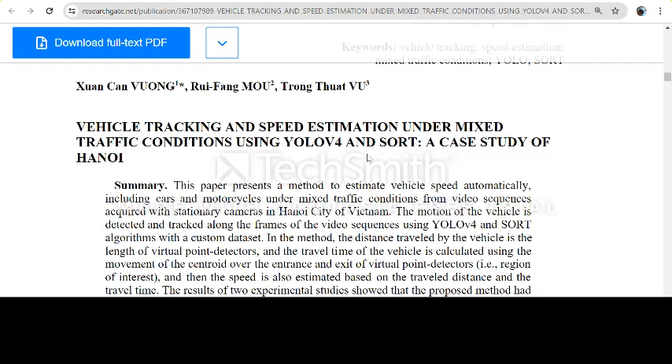This paper presents a method to estimate vehicle speed automatically, including cars and motorcycles, under mixed traffic conditions from video sequences acquired with stationary cameras in Hanoi City, Vietnam.

The motion of vehicles is detected and tracked along the frames of the video sequences using YOLOv4 and SORT algorithms with custom datasets.

In the method, the distance traveled by the vehicle is the length of virtual point detectors, and the travel time of the vehicles is calculated using the movement of the centroid over the entrance and exit of virtual point detectors, for example, region of interest. Then the speed is also estimated based on the travel distance and the travel time.

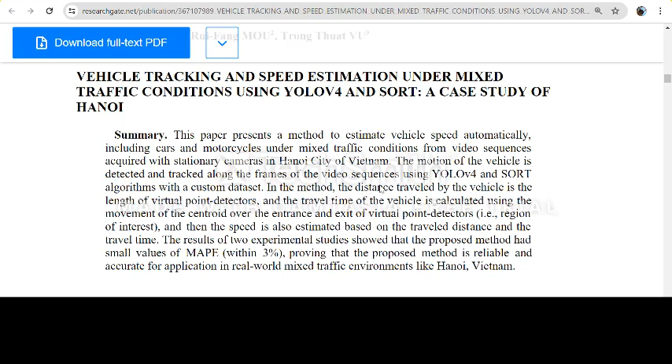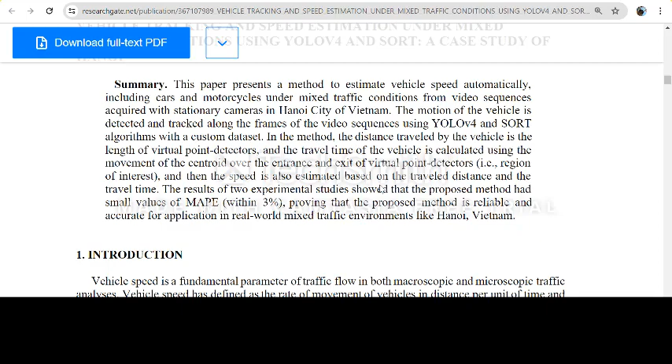The results of two experimental studies show that the proposed method has small values of error within 3%, proving that the proposed method is reliable and accurate for application in real-world mixed traffic environments like Hanoi, Vietnam.

Vehicle speed is a fundamental parameter for traffic flow in macroscopic and microscopic traffic analysis. Vehicle speed is defined as the rate of movement of vehicles in distance per unit of time, and it is indirectly or directly related to the traffic state and road conditions.

Speed measurement will help policymakers estimate and assess the traffic state and other anomalous events, as well as implement solutions to deal with the overspeeding behaviors of drivers.

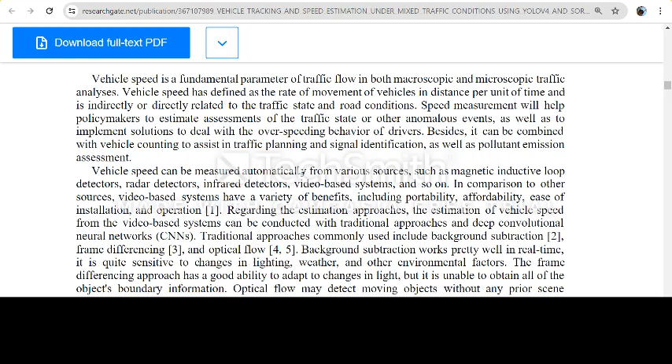Besides, it can be combined with vehicle counting to assist in traffic planning and signal identification, as well as pollutant emission assessment. Vehicle speed can be measured automatically from various sources such as magnetic inductive loop detectors, radar detectors, infrared detectors, video-based systems, and so on.

In comparison to other sources, video-based systems have a variety of benefits, including portability, affordability, easy installation, and operation.

Regarding the estimation approaches, the estimation of vehicle speeds from the video-based system can be conducted with traditional approaches and deep convolutional neural networks. Traditional approaches commonly used include background subtraction, frame differencing, and optical flow.

Background subtraction works pretty well in real time, but it is quite sensitive to changes in lighting, weather, and other environmental factors. The frame differencing approach has a good ability to adapt to changes in light, but it is unable to obtain all of the object's boundary information. Optical flow may detect moving objects without any prior scene knowledge, but is inapplicable for real-time detection due to its intricate and time-consuming calculation.

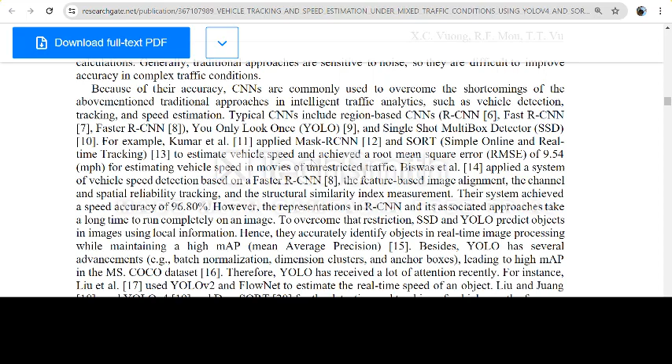Typical CNNs include Region-based CNN and You Only Look Once (YOLO). For example, Kumar et al. used these to estimate vehicle speed and achieved root mean square errors of 9.54 for estimating vehicle speed in unrestricted traffic.

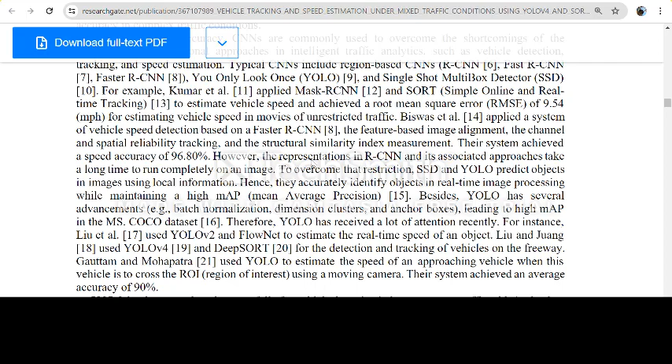Biswas et al. applied a system of vehicle speed detection based on Faster R-CNN, feature-based image alignment, the channel and spatial reliability tracking, and the structural similarity index measurement. The system achieved a speed accuracy of 96.8%. However, the representations in R-CNN and its associated approaches take a long time to run completely on an image.

To overcome these restrictions, SSD and YOLO predict objects in images using local information. Hence, they accurately identify objects in real-time image processing while maintaining a high mAP (mean average precision). Besides, YOLO has several advancements: batch normalization, dimension clusters, and anchor boxes, leading to high mAP on the MS COCO dataset. Therefore, YOLO has received a lot of attention recently.

For instance, Liu et al. used YOLO version 2 and FlowNet to estimate the real-time speed of an object. Liu and Juang used YOLO version 4 and DeepSORT for detecting and tracking vehicles on a freeway.

Gautam and Mohapatra used YOLO to estimate the speed of an approaching vehicle when this vehicle crosses the ROI region of interest using a moving camera. The system achieved an average accuracy of 90%. YOLO has been employed successfully for vehicle detection in homogeneous traffic where four-wheeler vehicles are used predominantly.

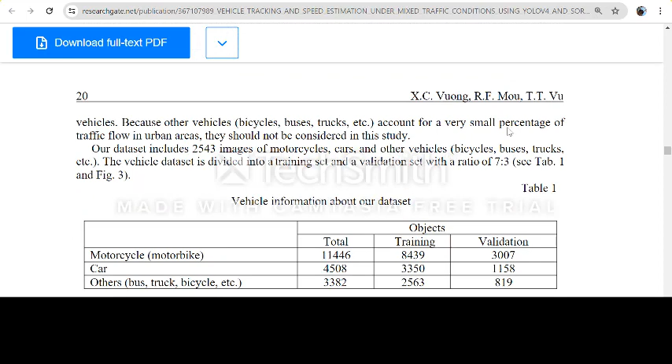We have considered two main types of vehicle categories for vehicle detection, including motorcycles and cars, which account for 95% of on-road vehicles. Because other vehicles like bicycles, buses, trucks, etc., account for a very small percentage of traffic flow in the urban areas, they were not considered in this study.

Our data includes 2,543 images of motorcycles, cars, and other vehicles such as bicycles, buses, and trucks. The vehicle data is divided into a training set and a validation set with a ratio of 7 to 3.

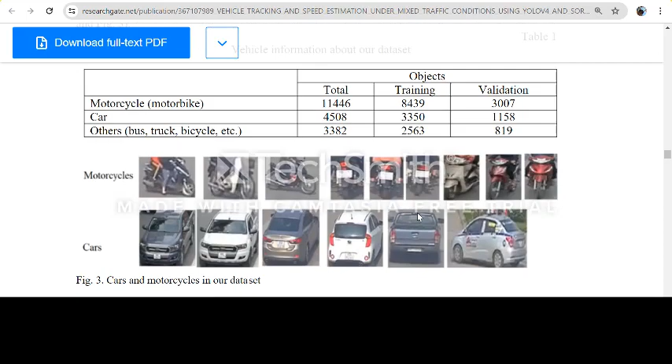Motorcycle, cars - the process of vehicle labeling in each image is done with the help of the LabelImg tool developed by Tzutalin. In the diagram, the training process on our dataset is shown.

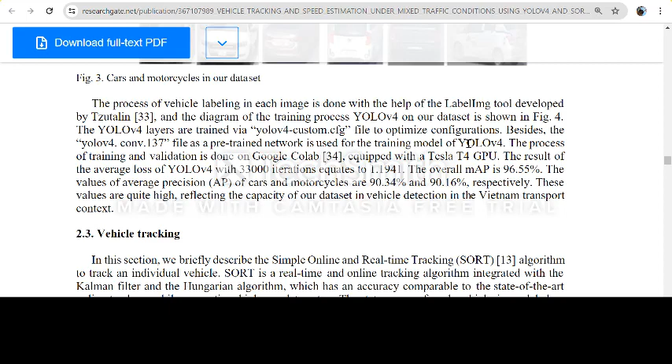The YOLO layers are trained via a YOLO custom configuration file to optimize configurations. Besides this, the YOLO file and the pre-trained network is used for training the YOLO model. The process of training and validation is done on Google Colab, equipped with a Tesla T4 GPU.

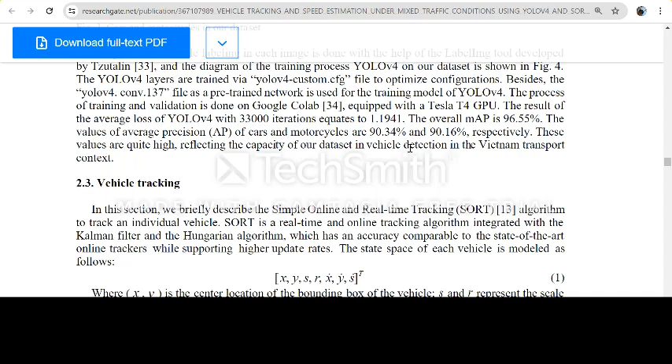The result of the average loss of YOLO version 4 with 33,000 iterations equated to 1.1941. The overall mAP is 96.55%. The values of average precision of cars and motorcycles are really high, reflecting the capacity of our dataset in vehicle detection in the Vietnam transport context.

In this section, we briefly describe the Simple Online and Realtime Tracking algorithm to track an individual vehicle. SORT is a real-time and online tracking algorithm integrated with the Kalman filter and the Hungarian algorithm, which has an accuracy comparable to state-of-the-art online trackers while supporting higher update rates.

The state space of the vehicle is modeled as follows, where x, y is the center location of the bounding box of the vehicle, s and r represent the scale area and the aspect ratio of the bounding box respectively, and the velocity element.

When a detection is associated with a vehicle, the detected bounding box is used to update the state of the vehicle. The location of the new bounding box for each vehicle is predicted based on the Kalman filter.

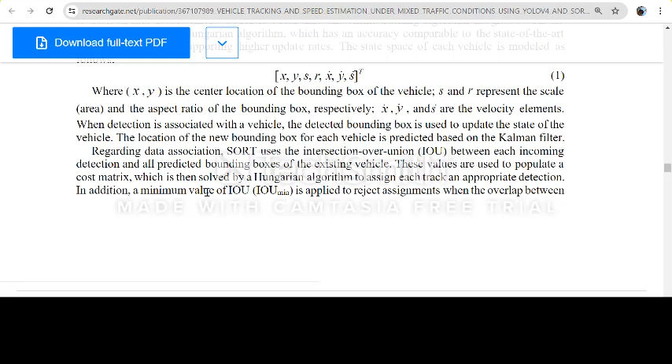Regarding data association, SORT uses the intersection over union between the incoming detection and the predicted bounding box of existing vehicles. This value is used to populate a cost matrix, which is then solved by the Hungarian algorithm to assign each track an appropriate detection.

In addition, a minimum value of IOU is applied to reject assignments when the overlap between the detection and the vehicle is less than the IOU threshold. The vehicle tracking procedure of SORT is shown.

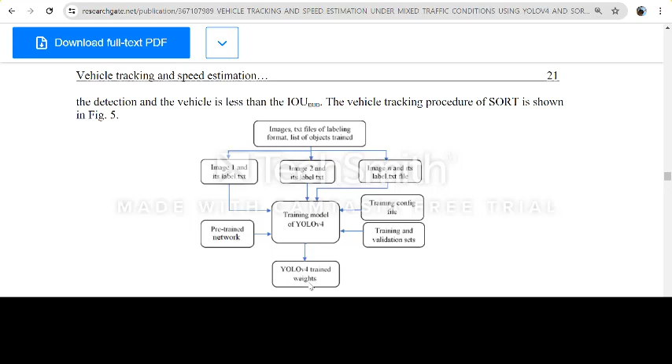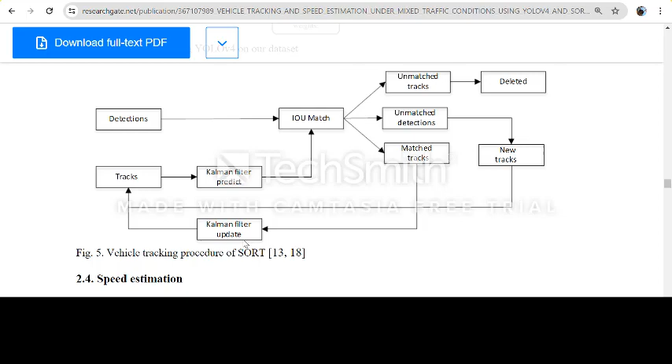Vehicle tracking procedure with SORT: detection, IOU match, unmatched tracks and unmatched detections. If a track is unmatched, it is deleted; for an unmatched detection, a new track is created, and tracks proceed with the Kalman filter prediction, going back to the IOU match. If tracks are matched, the Kalman filter updates, and the process goes back to tracking.

For each detected vehicle, the bounding box is used to identify and determine the central point of the vehicle, which is the most important thing for tracking and speed estimation.

While the vehicle is in the region of interest, it will be tracked and its travel distance calculated using the Euclidean distance. After that, we can estimate vehicle speed between some consecutive frames using the central point.

To simplify the calculation, in this paper we use a virtual point detector. Vehicle speed is assumed constant, and the travel distance of the vehicle is equal to the length of the virtual detector along the road, as shown in Figure 6.

The speed of the vehicle between the two scan lines, the entrance and exit, can be calculated by a simple equation as follows, where v is the speed of the vehicle traveling, t is the travel time of the vehicle, and d is the length of the virtual detector. In this study, we take d equal to 5 meters.

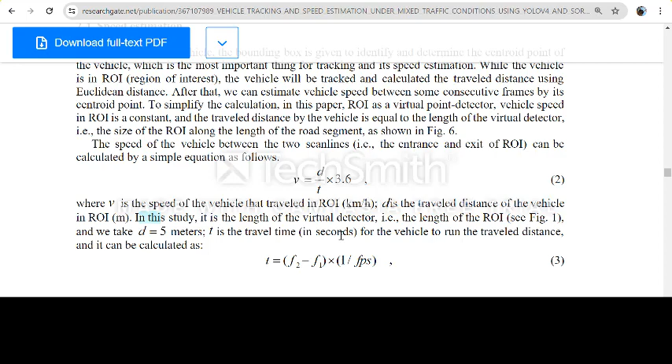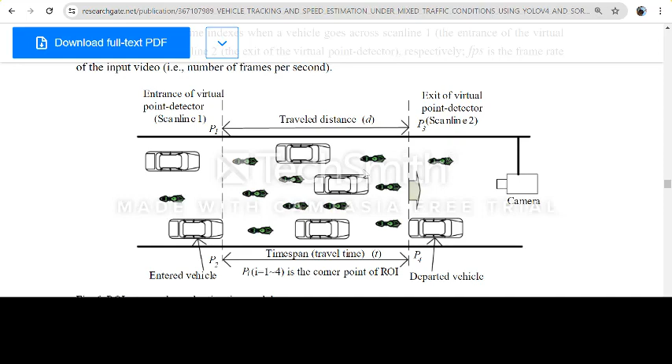T is the travel time in seconds for the vehicle to run the travel distance, and it can be calculated as you see. The travel distance and the travel time are between the entrance of the virtual point and the exit of the virtual point, with scan line 2 and scan line 1, and with that we calculate the speed and the time.

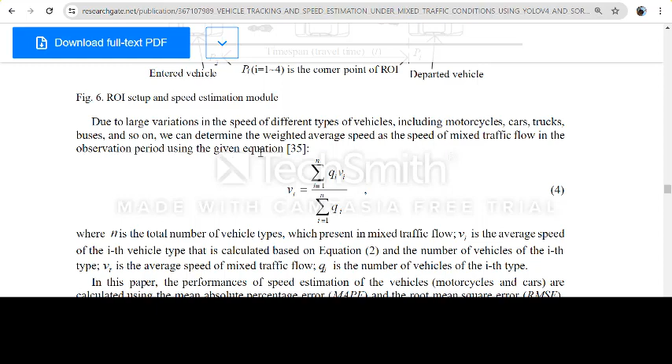Due to large variation in the speeds of different types of vehicles, including motorcycles, cars, trucks, buses, and so on, we can determine the weighted average speed of the mixed traffic flow in the observation period using a given equation, where n is the total number of vehicle types present in mixed traffic flow. The average speed of vehicle type i is calculated based on the equation, along with the number of vehicles of type i, giving the average speed of mixed traffic flow.

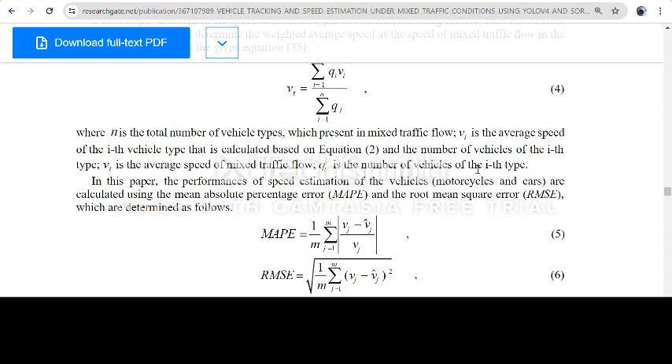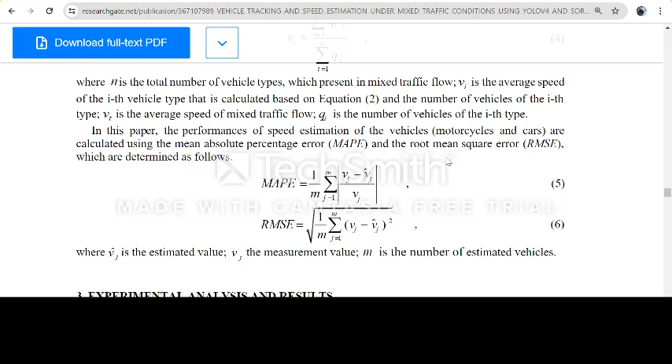In this paper, the performances of speed estimation of the vehicles, motorcycles and cars, are calculated using mean absolute percentage error and root mean square error, which are determined as follows. The experimental data and traffic videos are used to detect the vehicle's motion and estimate its speed. To evaluate the proposed method, we have carried out two experimental studies corresponding to locations in Hanoi city of Vietnam, which have certain differences in terms of geometric and traffic conditions as well as average speed.

The experimental data has been acquired by stationary cameras located at pedestrian bridges on Xuan Thuy Road and Me Tri Road. The videos had a resolution with 29 frames per second. The first experiment was a 1 minute video clip and the other a 3 minute video clip. The experimental studies were established using Python and were run on the Google Colab environment.

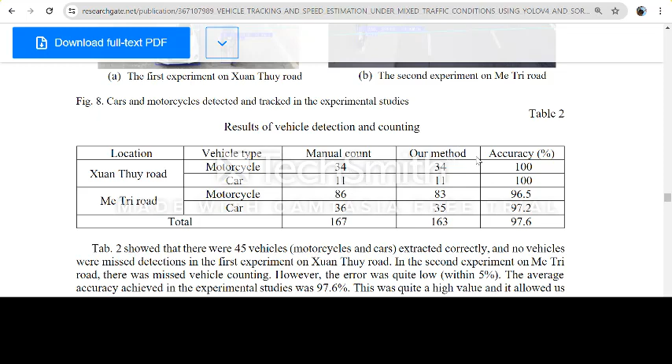Vehicle counting with our method and the manual method was the number of vehicles passing the road. The result of vehicle counting is shown in Table 2: vehicle detection and counting, manual counting, our method counting, and accuracy. Table 2 shows that there are 45 vehicles, motorcycles and cars, and no vehicles were misdetected in the first experiment. In the second experiment there were missed vehicle counting errors. However, the error was quite low, within 5%.

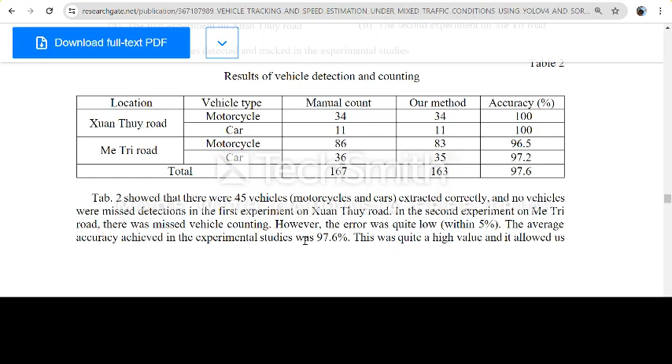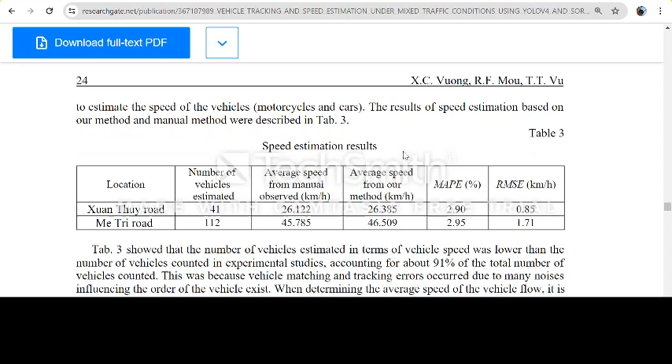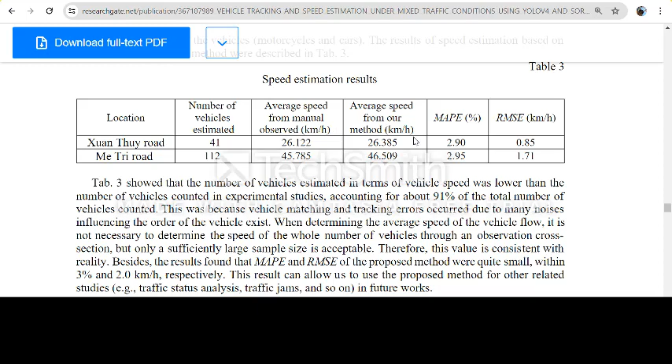The average accuracy achieved in the experimental studies was 97.6%. This is quite a high value, and this allows us to estimate the speed of the vehicles, motorcycles and cars. The results of speed estimation based on our method and the manual method are displayed in Table 3: speed estimation results, number of vehicles estimated, average speed from manual observation, average speed from our method, MAPE and RMSE.

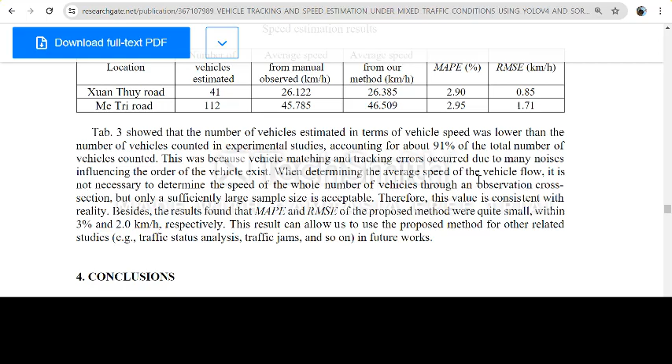The number of vehicles with estimated speed was lower than the number of vehicles counted in the experimental studies, accounting for 91% of the total number of vehicles counted. This was because vehicle matching and tracking errors occur due to noise. When determining the average speed of the vehicle flow, it is not necessary to determine the speed of the whole number of vehicles through an observation cross-section. Only a sufficiently large sample size is needed. Therefore, this value is consistent with reality.

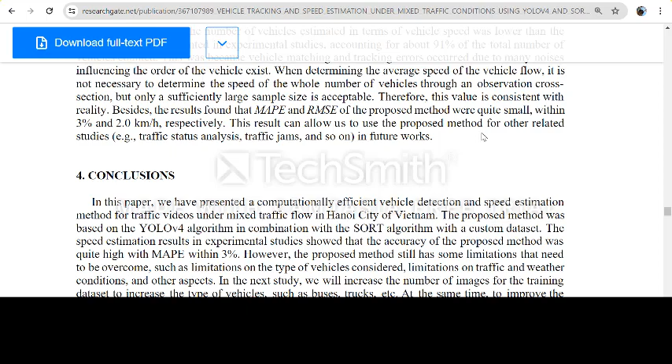Besides, the MAPE and RMSE of the proposed method were quite small, within 3% and 2 kilometers per hour, respectively. These results allow us to use the proposed method for other related studies, traffic status analysis, traffic jams, and so on in future work. In this paper, we have presented a computationally efficient vehicle detection and speed estimation method for traffic videos of mixed traffic flow in Hanoi City of Vietnam. The proposed method was based on the YOLOv4 algorithm in combination with the SORT algorithm with a custom dataset.

The speed estimation results in experimental studies show that the accuracy of the proposed method was quite high, within 3%. However, the proposed method still has some limitations to be overcome: limitations on the types of vehicles considered, limitations on traffic and weather conditions, and other aspects. In the next study, we will increase the number of images in the training dataset to increase the types of vehicles, such as buses, trucks, etc., and at the same time improve the algorithm to increase the accuracy of the proposed model in different traffic conditions in Vietnam. Besides, smartphone applications and real-time processing will also be of interest.